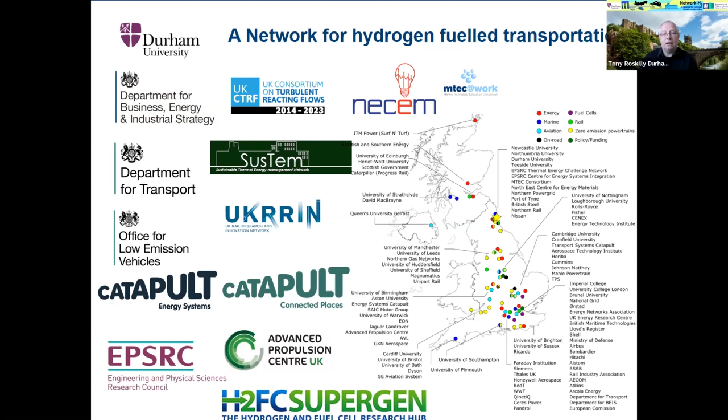The first 2 days of this conference are structured around the themes of Network H2, that's the Network for Hydrogen Fuelled Transportation, which is funded by EPSRC and led by myself at Durham University. The network brings together researchers, companies, governments, and other stakeholders across the UK and interacts with internationally leading organizations and researchers across many different countries in the transport field.

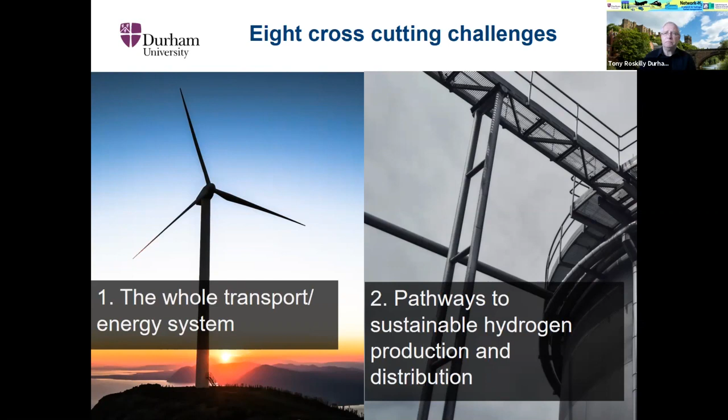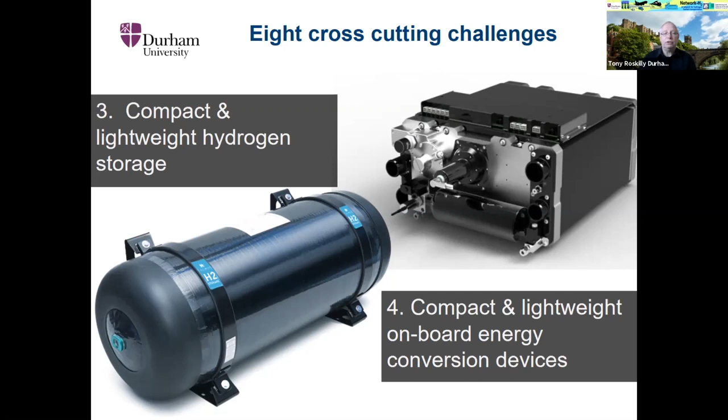The structure of the network is around 8 cross-cutting themes. Firstly, on whole transport and energy systems and the interaction between them, pathways to sustainable hydrogen production and its distribution, compact and lightweight hydrogen storage, and more compact and lightweight onboard hydrogen energy conversion devices. Also on improved lightweighting and efficiency of electrified powertrains for transport applications,

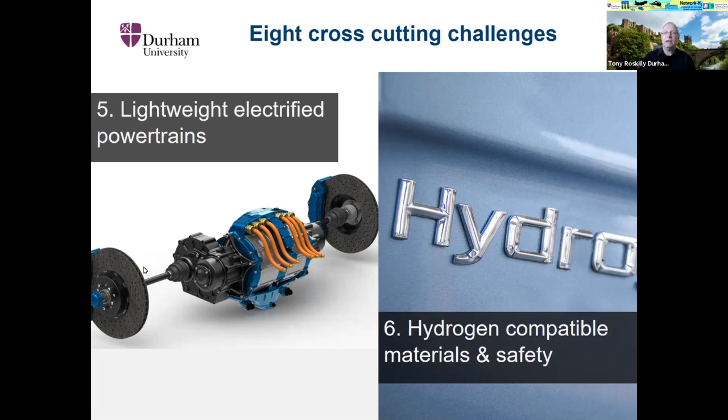hydrogen compatibility of materials and their safety. And the final 2 themes are on multimodal transport, logistics and autonomy, and policy, economics and societal impact.

So EPSRC funds this national network, as I mentioned, and has been awarded to us to allow us to act as a forum to maximize impact from the research that they fund and the research that UKRI fund, and to communicate and share best practice and disseminate information and data all around the theme of hydrogen fuelled transportation, and that's all transport modes.

Also to capture state-of-the-art and identify the research challenges from that exercise and examine ways to incentivize and look at the barriers that exist to the take-up of hydrogen for transport. We also have 50% of our funding to support new research programs, so funding cross-cutting projects to unlock research on hydrogen transport applications.

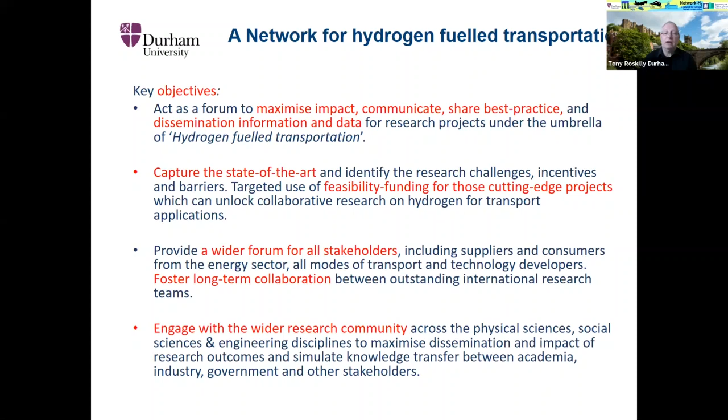Also, we aim to provide a wider forum for all stakeholders, again, for all modes of transport and technology developers, and to foster long-term collaborations between outstanding international research teams. And finally, to engage with the wider research community across the physical sciences, social sciences, and engineering disciplines to maximize dissemination and impact of the research outcomes, and to stimulate knowledge transfer between academia, industry, government, and other stakeholders.

So over the 2 days, we are looking at the challenges across different forms of transport, as well as developing the supply chain to support this hydrogen transition. So today is organized in 3 parts. And we're moving now into covering storage and end use of hydrogen.

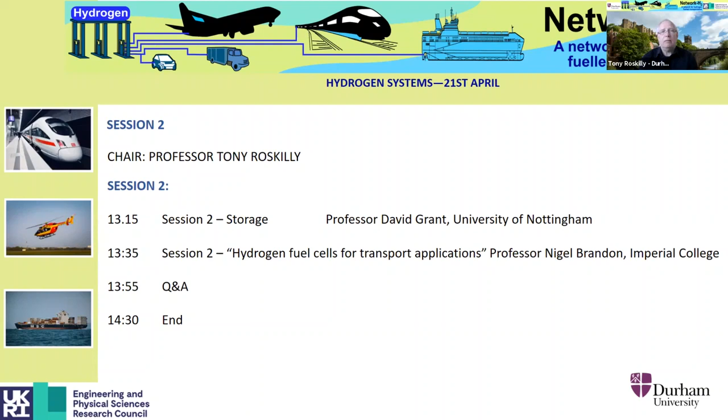So let me introduce our first speaker this afternoon. So it's Professor David Grant. David leads the Advanced Materials Research Group and the Beacon on Propulsion Futures at the University of Nottingham. He conducts research on the storage of hydrogen and of thermal energy, and also does research on biomaterials for surface modification, coatings, nanocomposite structures, and degradable materials. So, David, over to you.

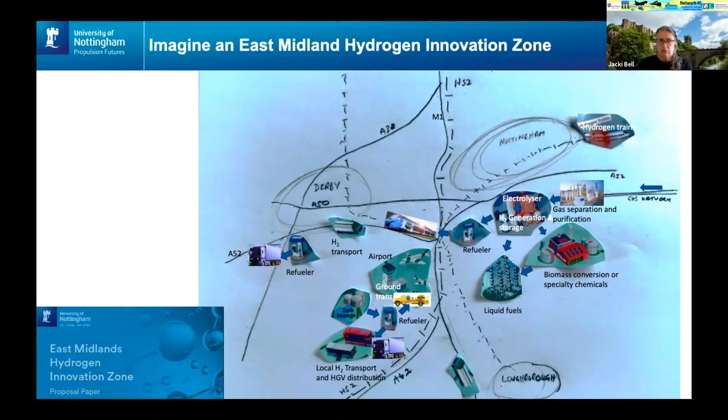So hydrogen storage is an important part of the whole process, whether it's generation, distribution, storage, usage and conversion into other fuels, synthetic fuels and ammonia. So by way of reminding everybody, hydrogen itself has got a great gravimetric density, so it's like 3 times that of diesel or gasoline. But of course, volumetrically, it's a bit more tricky to contain and keep the size down.

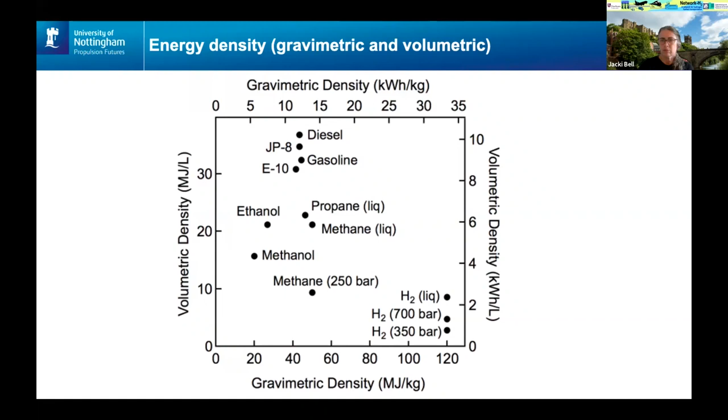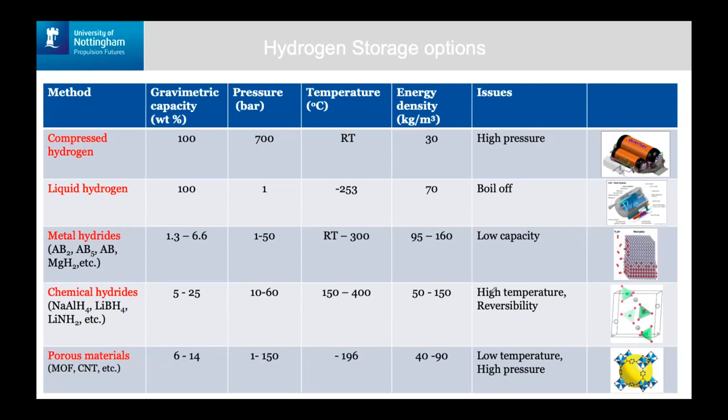Or you can store it in a porous material by physisorption process. Now, compression and liquefaction you probably know quite a lot about. Chemically storing it has a lot of advantages, and I just wanted to explain a little bit about some of the areas that it might have an impact.

And so there's an interest around whether liquid hydrogen tanks are sufficient for certain types of transport, particularly in aircraft. And this is not a new concept. This has been around for a while. There's a paper over 10 years old now, where you look at a regional aircraft, and you can see that the fuel mass you require for particular journeys is roughly 35% of the kerosene.

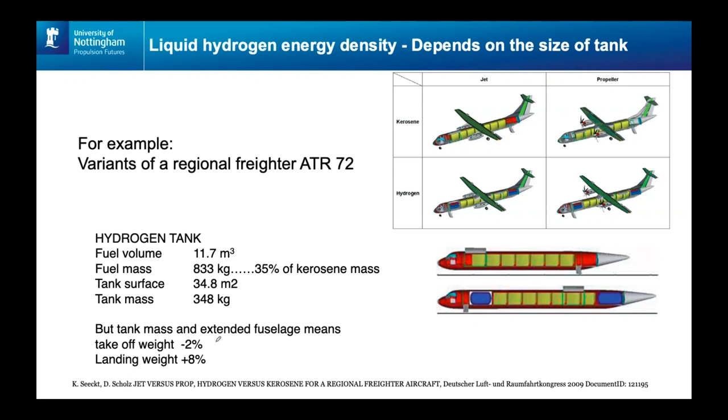But of course, you've got to store the hydrogen, and if it's in the liquid state, you're going to have to redesign the aircraft completely and extend it to accommodate that extra volume. But actually, in terms of the overall takeoff weight, it's slightly less, although the landing weight, because of all the infrastructure, is more. So it comes down to cost and modification, and so there is a place for liquid hydrogen, not just for transporting it around the world.

So these complex hydrides of light elements have these attractive energy densities. Why aren't they being used at the moment? Well, you can have a very good weight percentage per unit mass. For example, the DOE in the States looks at 7 weight % as a reasonable number: 7 weight % of your tank is hydrogen. Compare that with compressed gas, about 4 or 5 weight % of the tank is actual hydrogen.

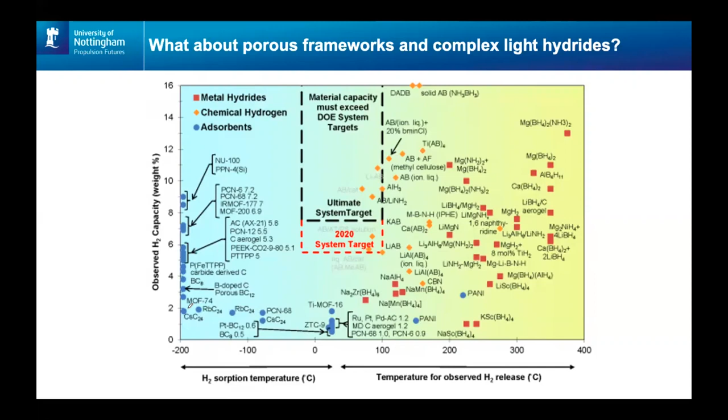Just to show you how that would work, this is lithium borohydride with various additives. This one has a magnesium additive, and you can reduce the temperature down to 350 to release the hydrogen, but it's still way too high. So research is still ongoing to find that ultimate material. For the moment, the cost-effective ones are the cheap metal hydrides. Magnesium hydride has 7 weight %, but the trouble is you have to heat it up to 300 degrees to release it.

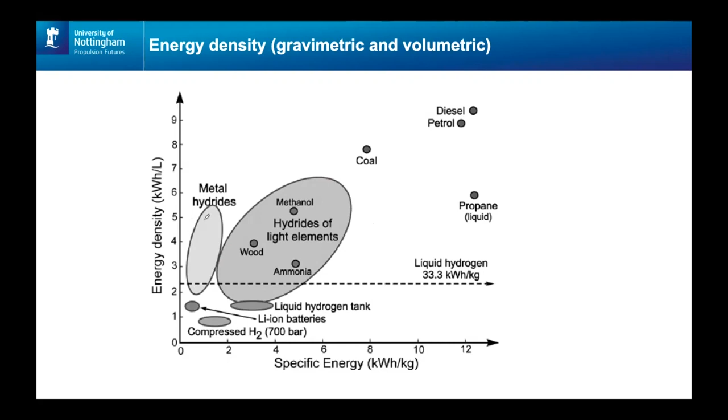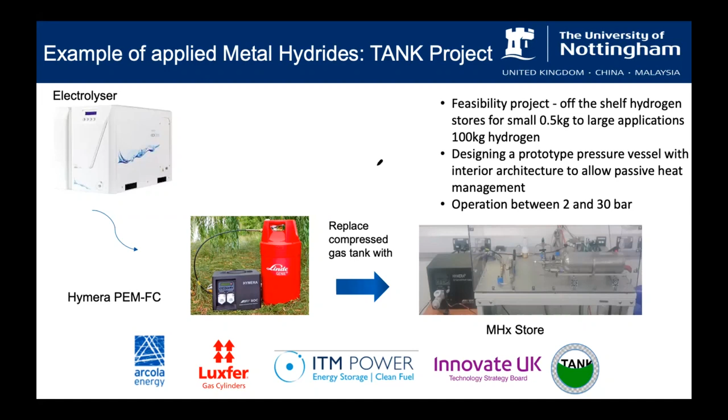So we're interested in metal hydrides that operate at room temperature, because there's no net problem in releasing them. And of course, the advantage of these hydrides is that they store hydrogen at a few bar. So what you do is you take some stationary store, in this case, and instead of having a compressed gas, you could replace it with a very small tank on the right-hand side, and you'd have the same amount of hydrogen stored in that kind of scenario. And this is what we've been doing here.

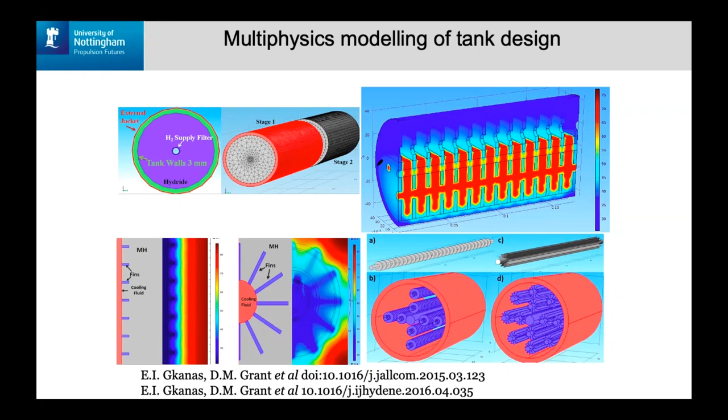It's an exothermic endothermic reaction, so you have to make sure the heat throughout the bed works, and so that's one of the design challenges for these, but these are not insurmountable, and in fact we've done a lot of work with UK Innovate projects delivering that. The other challenge is to try and make the material take up more hydrogen. As I say, the metal hydrides take up to about 2 weight %. If we could get that to maybe 4 weight %, or even 3, then it becomes very interesting indeed.

Now, at Nottingham, we've been trying to replace these hydrides, which have vanadium in them, with ones which don't have vanadium in. And that's meant that we have a cost reduction of about a factor 5. So in terms of the material, we've dropped it from about £50 per kilo to roughly around £9 a kilo. And this starts to make sense for stationary stores.

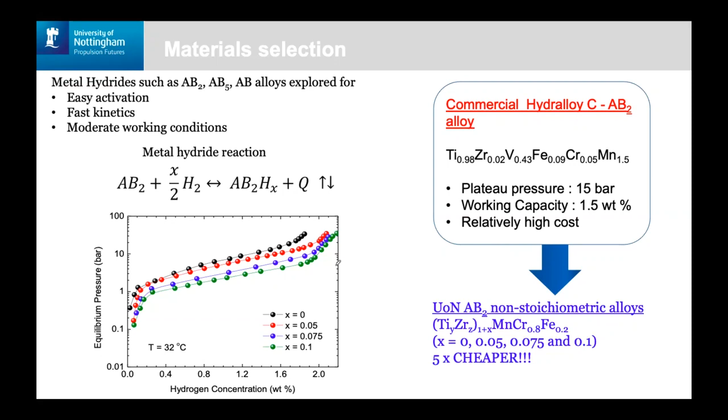We heard this morning that there's a need to store hydrogen locally and safely around locations. And of course, as you can see from this graph, you can store hydrogen at modest pressures, 5 bar or 10 bar, and you can tune that pressure, and then you can release it into a fuel cell without having to use a regulator or anything like that. So there's a lot of interest in these kinds of systems. And so in terms of research, we're now looking at artificial intelligence and machine learning to develop new materials, and this is where the current research is developing.

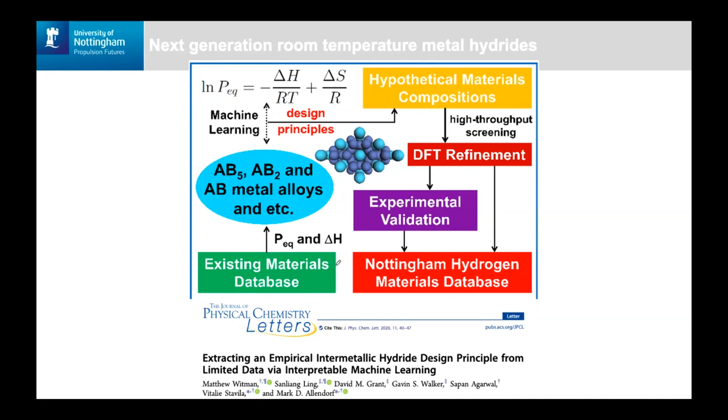So let's go back to the transport again. So for road and rail, let's consider a compressed gas hydrogen refueler. So we've got a hydrogen refueler at Nottingham, a test bed there, and of course you probably recognise the Alstom hydrogen train. Of course that's got compressed gas in it, so that needs a significant volume. Remember, it's about 4 to 5 weight % of the hydrogen in a compressed gas tank in terms of its weight, and volumetrically it's much inferior to metal hydride stores.

And so imagine you have a refueling station, and you're close to other houses or other places. We started to look at some modelling around what would it be if we took the buffer tank that's used in these electrolyzers. This is with a UK Innovate project. Could we replace the buffer tank with a metal hydride tank, and what effect that would have? And essentially, it means you can refuel maybe 30 times more vehicles, because the space that you need is considerably reduced because the volumetric energy density of metal hydrides is so much superior.

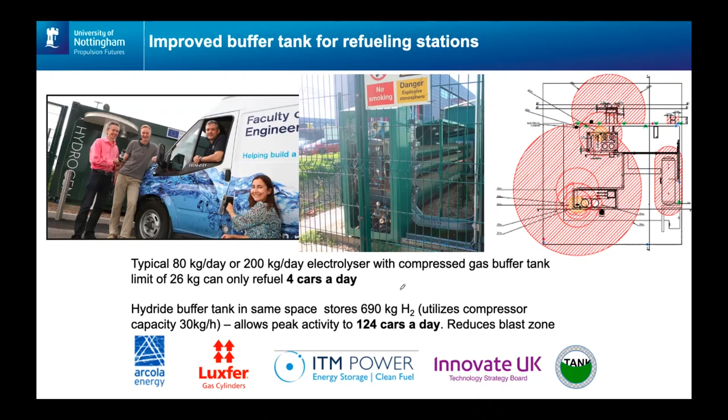And so it's a great way of compressing gas without having to use a lot of energy and very few moving parts. The only moving parts you'd have would be a valve opening and shutting. So this is part of a project that we're working on as well.

All right, and so I've covered air, road, rail. What about marine? Well, marine, as you may know, there's a lot of interest in using ammonia for marine. And of course, the flame speed of ammonia is quite slow and lower temperature. So one suggestion is to prevent NOx forming, that you'd have the high flame speed that hydrogen gives you, and this, putting a pilot flame into that system, can produce a more efficient system, and one of our colleagues at Nottingham is looking at this.

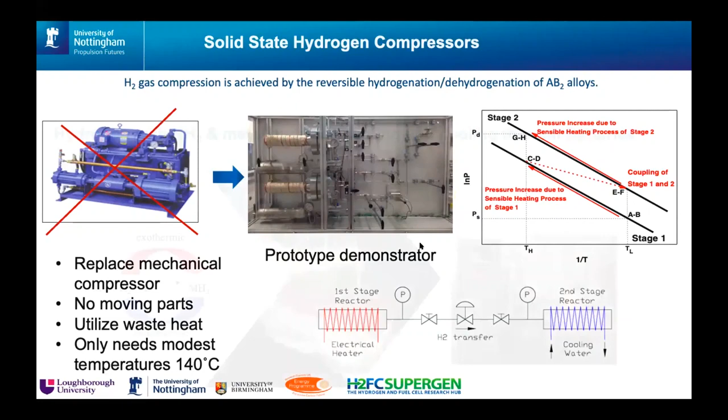I just want to finish by saying that we've got a great demonstration facility here at Nottingham, and welcome anybody who wishes to come and use it. We've got a 200 kilowatt electrolyzer. We're feeding into buildings next door. For example, we've got a brand new power electronics building, which is the largest power electronics group in the world, I'm told, and we're delivering hydrogen stores into fuel cells and then into electric motors and drives. So they've got a 20 megawatt test facility. It's an amazing test facility they've got there.

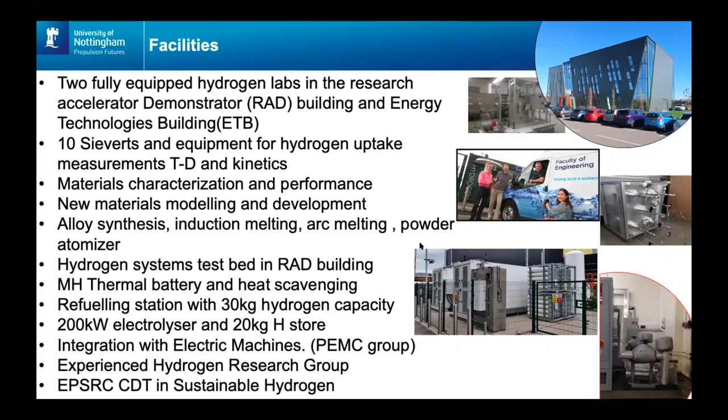So we've got some really interesting stuff, and if you're interested in any of that, or the Hydrogen Innovation Zone in the East Midlands, we'd be really interested to hear from you, and thank you for your time.

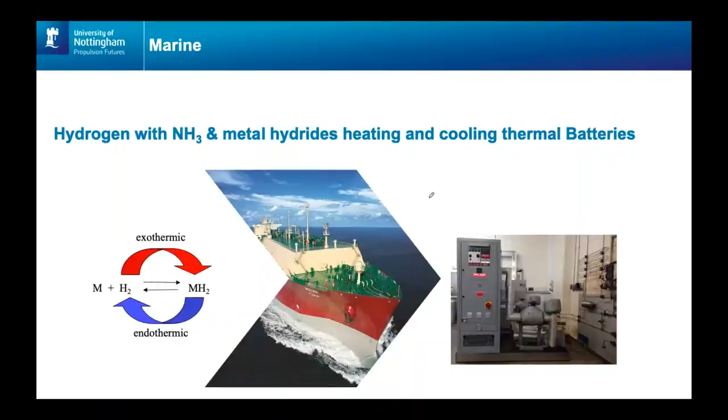Yeah, thanks very much, David, for an interesting presentation on storage and the options and the facilities and capability at Nottingham. We'll move to the second presentation. It's going to be given by Professor Nigel Brandon from Imperial College London. Nigel is Dean of the Faculty of Engineering at Imperial College. His research is on electrochemical devices for low carbon energy applications, with a particular focus on fuel cells, electrolyzers and batteries. He is director of the UK Hydrogen and Fuel Cell Supergen and chair of the Sustainable Gas Institute at Imperial. Nigel is also a founder of Ceres Power fuel cell company and RFC Power, a flow battery company. So over to you, Nigel.

Well, thanks for the kind introduction. I'm going to try, a bit like David, to give a broad overview really around hydrogen fuel cells for transport applications, touch a little bit on some of the issues around fuel cells in brief, and then an overview of where the technology is today, and then we're happy to take any questions. As you kindly mentioned, I'm a director of the Hydrogen and Fuel Cell Supergen, which is, as I'm sure many of you know, one of the Research Council's investments in the energy space. And we specialize in hydrogen and we specialize in fuel cells. And there's a web link at the end of this presentation, or you can find it relatively straightforwardly if you want to see the sorts of things the hub is up to.

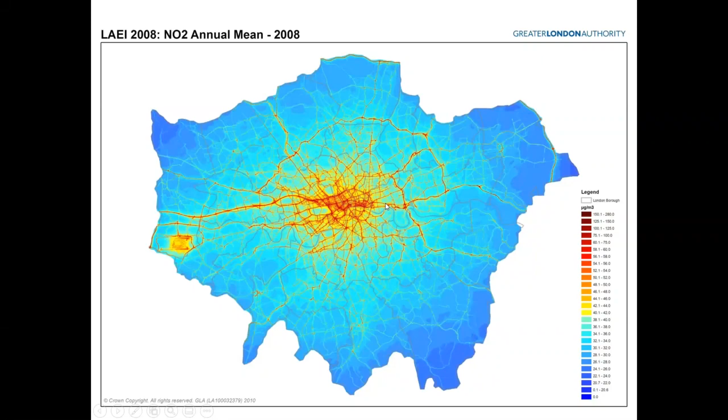There's a carbon focus, and that's obviously very strong and really has brought hydrogen back onto the map as far as policymakers are concerned. But air quality matters as well, and this is a little bit old, but I think it's a nice picture showing NOx emissions in London, and the brighter the red, the higher the level. And this is Heathrow back in the day when we used to get on aeroplanes and fly places. But these are the main arterial routes in and through a big city like London, and it's indicative of the impact of transport emissions, not only on carbon, but on local air quality.

And again, just to remind ourselves, because it matters, whilst we're talking today about hydrogen for transport, that is going to be very strongly coupled to hydrogen production, distribution, and end use in other sectors as well, not the least of which in driving the price and cost of the hydrogen we're going to put into that vehicle. So I'm sure you talked about that earlier today. Sorry I couldn't be with you, but it reinforces the point that this is a system piece. Whilst we're going to focus in this talk on the vehicle and the powertrain of that vehicle, the issue around the hydrogen distribution system and production method, of course, is very important.

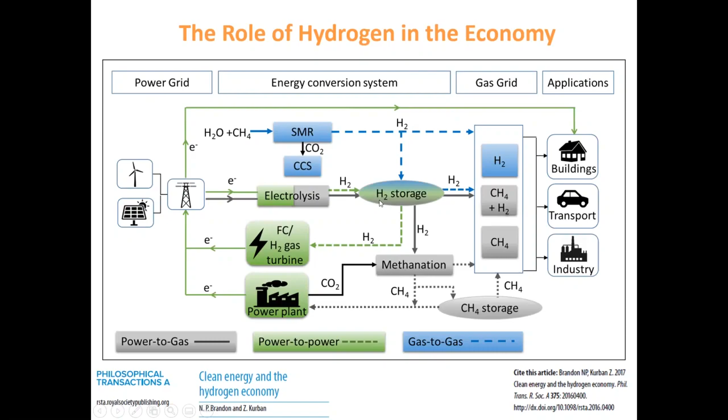So let's talk a little bit about fuel cells. I'm going to concentrate on fuel cells as the energy conversion device for hydrogen. It is certainly the case that you can put hydrogen into heat engines, particularly for large-scale gas turbines, and there are certainly very serious companies involved in producing hydrogen turbines today.

But I'm going to talk about fuel cells because if we're going to put our hydrogen into a vehicle that's not a very large vehicle, so for example, a car or a bus or a truck, mostly these are not going to be gas, and you've got to be very large before it becomes a gas turbine. So for transport applications, with the possible exception of air, fuel cells, I think, are the rational choice. They give you a high electrical or conversion efficiency, and that's one of their key attributes.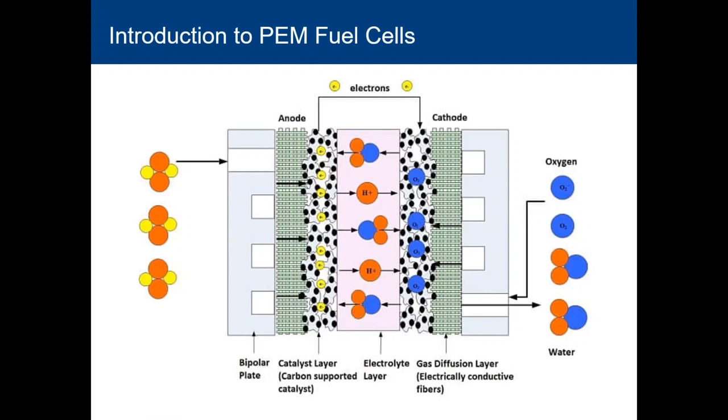So if we look at a cartoon of a stack, as I say, a fuel cell stack, which produces something like a useful output for a vehicle, like a 50, 100 or 150 kilowatt stack for your electric vehicle, is comprised of many individual cells, each cell under operating conditions producing around 0.7 volts, producing just over a volt at open circuit when no current is being drawn.

We have these MEAs, which are these membrane electrode assemblies. This is the gas diffusion layer coupled with the catalytic layer in the electrolyte, and they are separated by these bipolar plates or these interconnect plates, which distribute the fuel and air and are also part of the thermal management system. Fuel cells are exothermic devices.

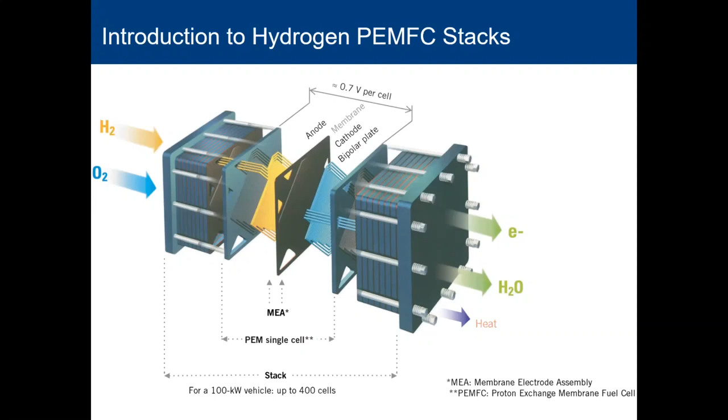So again, if we're up at perhaps a power density of 3 or 4 kilowatts a litre, then we also have to manage heat, given that at that point it's probably about 60% efficient. We also have to manage 2 to 3 kilowatts per litre of heat from the device. So the higher pressure, the higher power stacks are going to be liquid cooled. Lower power stacks may be air cooled, but for a lot of vehicle applications, we're dealing with higher power stacks, and so we're dealing with liquid cooling.

So you've got some form of air compressor or air blower. You've got some form of water management system. You've got to put your hydrogen through and humidify that and recuperate water, for example, and re-inject it. And obviously you've got to thermally manage the stack itself via some form of radiator. So all of these components are important.

Obviously, you also have to have some form of power electronics, and the fuel cell itself is likely to sit inside some form of hybrid system alongside a battery. And of course, as David has just explained, very importantly, alongside the hydrogen storage system as well.

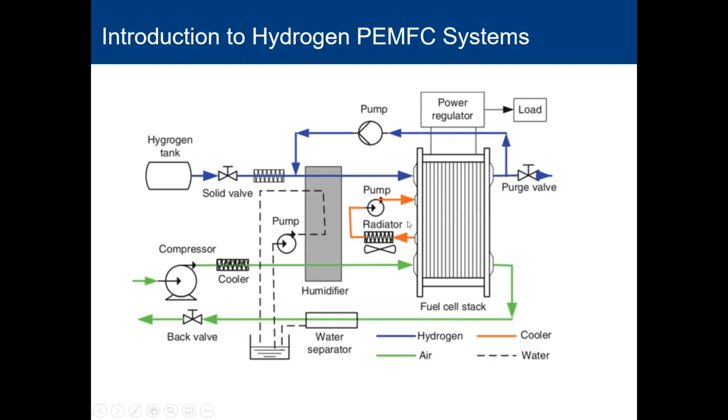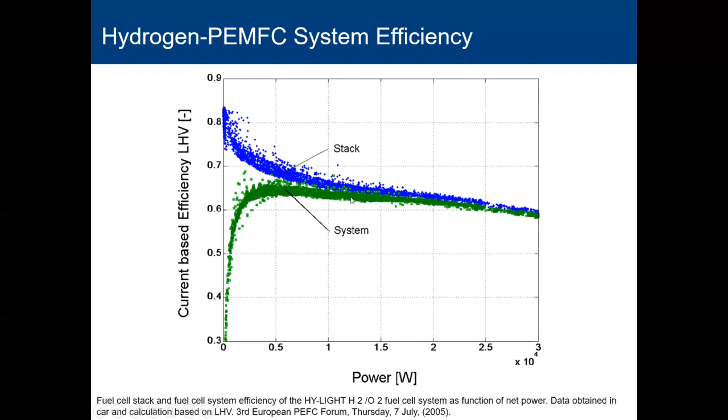So as we go down in power, the efficiency at the system level will go up until it gets to a point at which you're simply servicing the balance of plant components. And then the efficiency will start to fall down as we hit the parasitic loads on the system. But across most of the drive cycle for a vehicle, unlike a heat engine, which tends to have a rather peaky efficiency power curve, a fuel cell efficiency will go up as we go to part load. So in real driving cycles, this is a very attractive characteristic to give us overall improvements in fuel economy.

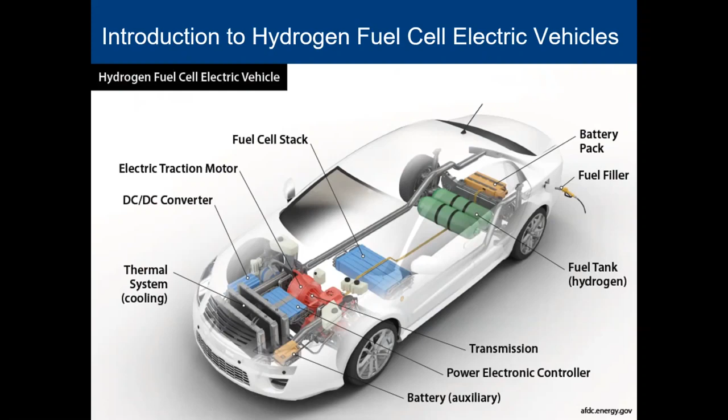So where are the technologies today? And I think, John, I might have spotted John Hunt's name in the room. So John, thank you again for your support. This is the Toyota Mirai that we have at Imperial College. Toyota very kindly made available a number of hydrogen fuel cell Mirais around a number of academic institutions, including ours.

And we're very grateful for it, and I enjoy driving it, and it gives us a good opportunity to experience what an actual hydrogen fuel cell car is like. It's very convenient and nice to drive. It's not so super convenient to refuel, and indeed we don't have a huge amount of choice, but we do have choice in London. There are about 4 or 5 actually now relatively convenient places we can go and refuel this car. But the landscape on hydrogen fuel cell light duty vehicles is growing.

It's an area where in fact the hydrogen fuel cell vehicle is going pretty much head to head with the battery electric vehicle. And we can happily discuss that in the Q&A perhaps, about the relative merits. But it's certainly the case that this is an electric car that you can refuel in a few minutes and do 300 to 400 miles in. And that has a whole bunch of advantages.

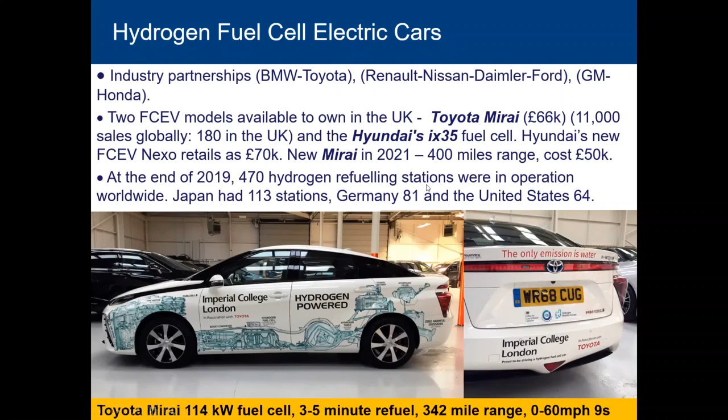Toyota brought out a new Mirai, and of course we also have the Hyundai fuel cell Nexo, and so there's some interesting vehicles emerging in the hydrogen fuel cell car space. You are of course into this debate about the hydrogen refueling infrastructure, and it is important that you develop both the vehicle fleet and the refueling infrastructure at the same time.

If we move away from cars and we move into heavy duty vehicles, I think there is really no debate in my mind and in the mind of many others that this is a clear sweet spot for hydrogen fuel cell electric compared to battery electric. As the amount of energy you need to carry on the vehicle goes up, the benefit of having a hydrogen fuel tank becomes increasingly marked. So for buses and some of the other applications I'm going to discuss, there's a huge amount of emerging interest in hydrogen fuel cell electric.

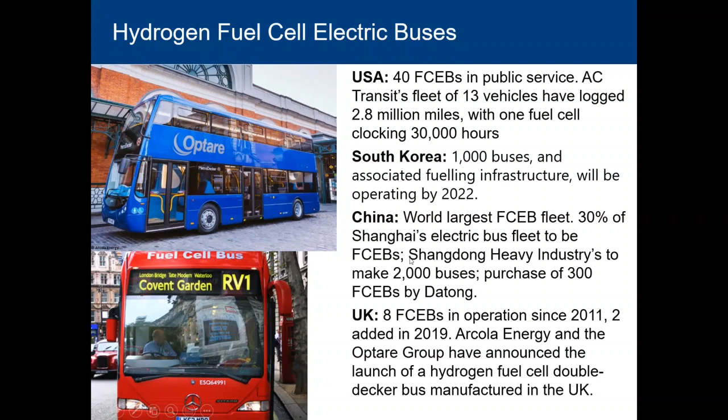This is a UK program here, and I think again, I saw Arcola mentioned on one of David's slides. So Arcola are a UK fuel cell integrator working with Optare to launch this hydrogen fuel cell double-decker bus. And in London, we've had these European trial buses effectively driving around for a number of years now. And of course, they're also in other cities now in the UK.

If we move away from buses into trains, David also showed this photograph of the Breeze hydrogen fuel cell battery hybrid system, which has been built by Alstom and Eversholt Rail for the UK. And also we have this University of Birmingham and others' HydroFLEX hydrogen fuel cell electric train on test. So this is a really interesting market. I've worked in fuel cells a long time, and a number of years ago, we wouldn't have foreseen hydrogen fuel cells for the train market.

But this is to replace diesel on the sorts of largely suburban lines that are too expensive to justify electrification by overhead cable, for example, but where you can think about electrifying with a hydrogen fuel cell. And a number of these are now running in Germany and Austria, showing very good performance, and we're starting to evaluate them here in the UK.

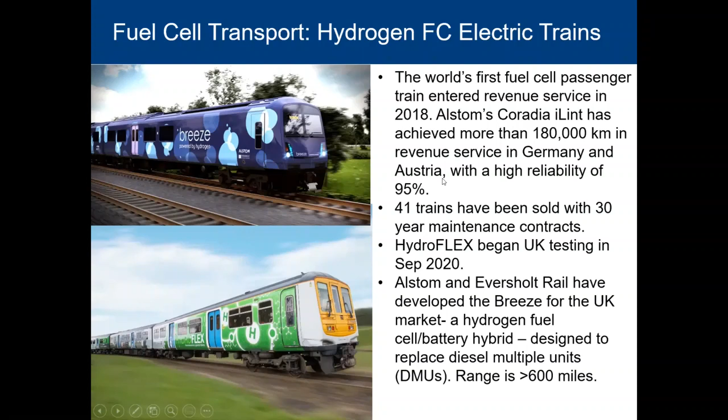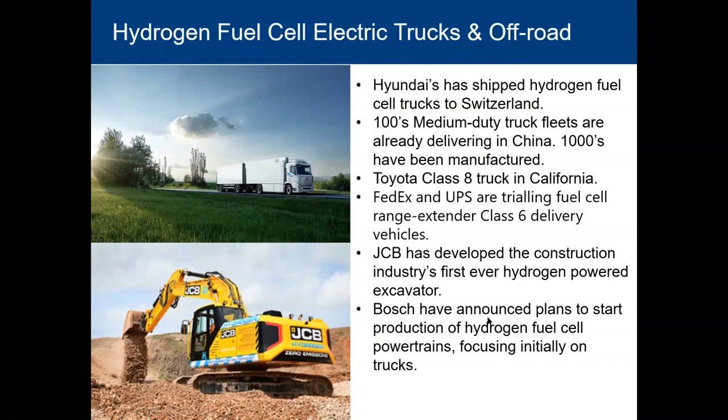If we move again then into trucks and off-road, again, a very clear opportunity. I don't think really that hydrogen is now competing with batteries. I think it's competing with synthetic fuels or e-fuels or biofuels. These are Hyundai trucks now being shipped over to Switzerland. Of course, in the UK, we have JCB looking at hydrogen-powered excavators. We've got Bosch talking about setting up hydrogen fuel cell powertrain manufacture, again for the truck sector.